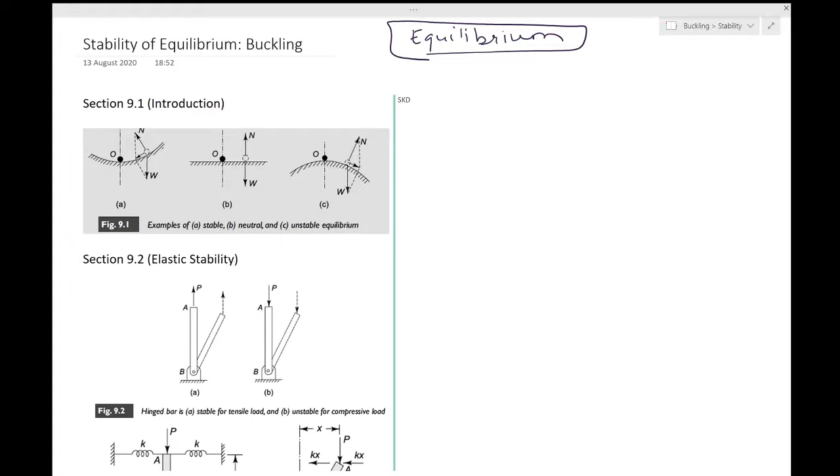In this chapter, we shall widen the scope of our investigation by considering the behavior of systems when slightly disturbed from their equilibrium configuration. So this is what we do—we want to disturb this slightly. Until now we haven't done this.

We want to see what will be the behavior of a system that is originally in equilibrium when you slightly disturb it. When the forces no longer balance within a system, there will be acceleration and, in general, a complicated resulting motion. We shall not attempt to obtain a complete picture of this motion, but restrict our attention to this question: when slightly disturbed from an equilibrium configuration, does a system tend to return to its equilibrium position, or does it tend to depart even further? This is about the configuration of a system.

The words are very careful, and that's why they have been italicized in your textbook: when slightly disturbed from equilibrium configuration, does a system return to its equilibrium position, or does it tend to depart even further? So just take a particle physics example.

You have particles 1, 2, 3, and 4, and they are in equilibrium—meaning the forces and moments of this system are balanced. Now if you slightly disturb this system from its equilibrium position, taking one point to somewhere new, will this new configuration—which is not in equilibrium but slightly outside of it—rearrange itself back into equilibrium, or will it become more away from equilibrium? This is something we have already seen earlier.

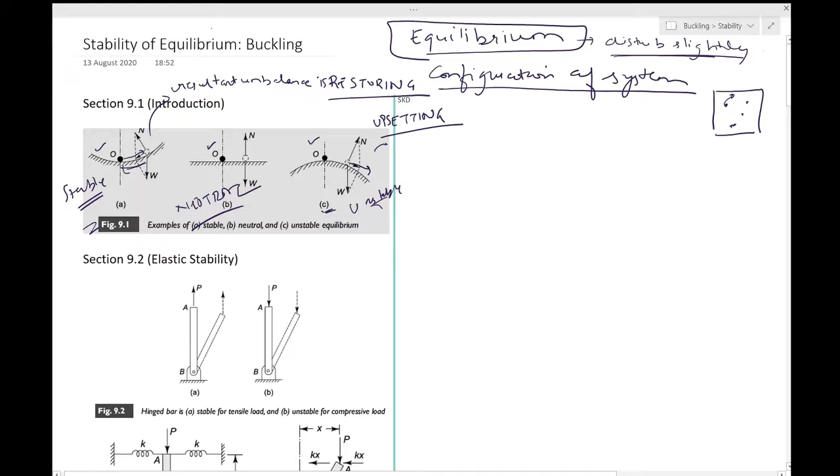A system is said to be in a state of stable equilibrium if, for all possible geometrically admissible small displacements from the equilibrium configuration, restoring forces arise which tend to accelerate the system back towards equilibrium. Please note the definition very carefully. It says for all possible geometrically admissible small displacements.

It was possible for this to go over here, at this new position, but this was not geometrically admissible given the way we were in this problem. So it has to be either along this or along this. So, all possible geometrically admissible small displacements. Small is again important, because you want to only slightly change the configuration, like this was only slightly moving on this side to disturb from equilibrium.

Restoring forces will now arise which tend to accelerate the system back towards equilibrium. Do remember, coming from this state back to equilibrium is through acceleration. There is no equilibrium over here, no equilibrium over here, but equilibrium at this point O. Neither at this point was there equilibrium, nor in this path from this to this will there be equilibrium. That is something you have to keep in mind, that your system will be in acceleration when it wants to come back to equilibrium, in stable equilibrium.

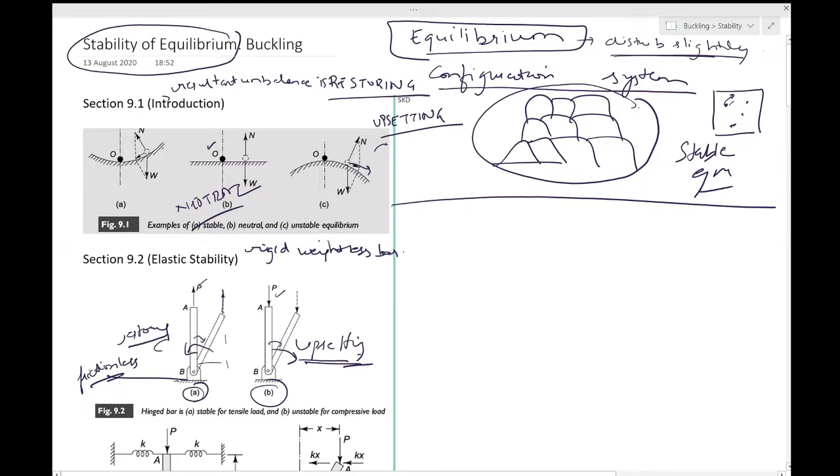Now let's see this in terms of another example. So this unstable structure is what we want to see now. It can be stabilized by adding guy wires or transverse springs. So for this system B, if you put in springs like this, then this will be stabilized.

How would that happen? If you give a small rotation like this, it would be somewhere over here, and you would have P. What would be happening? This particular spring will try to pull it back, this particular spring will try to push it back, so it will have to go back over here. It is sort of competing. So these two springs are trying to compete against the upsetting torque which would act to destabilize it. Let's study how that happens.

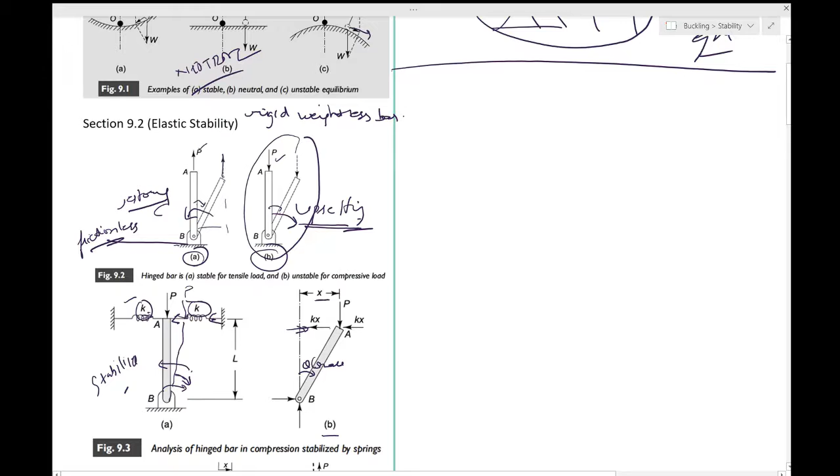So in this one, you have a free body diagram to analyze the effect of small transverse displacement x. What has happened is that this edge has moved x, and that means a small rotation has happened. And this is small, that's the important part. You can almost assume that this is going horizontally like this and not through an arc, but horizontally. The movement is horizontal, reason being this is small. If it is small, then the arc can be replaced by a tangent. So this is the tangent.

So if x is that small transverse displacement, what are the spring forces which act in the horizontal direction? That will be kx plus kx. Then you want to find the torque. That torque will be because of this lever L, so that will be 2kxl, restoring. And the upsetting torque, which is due to P, will be equal to Px. This is just like R cross F, so this will be your force, this is your x, this will be P. So that is Px. So you have 2kxl which is restoring, Px as upsetting.

Now you want to discuss the stability of this system for small deflections. The small word is always there, it has been there throughout. Now it depends which of them is larger. If the restoring is larger, in the sense Px is smaller than 2kxl, then you will have a stable equilibrium. If Px, which is the upsetting, is larger than the restoring torque, then this will be unstable equilibrium. So this is fair enough, and you can see why these two conditions are there.

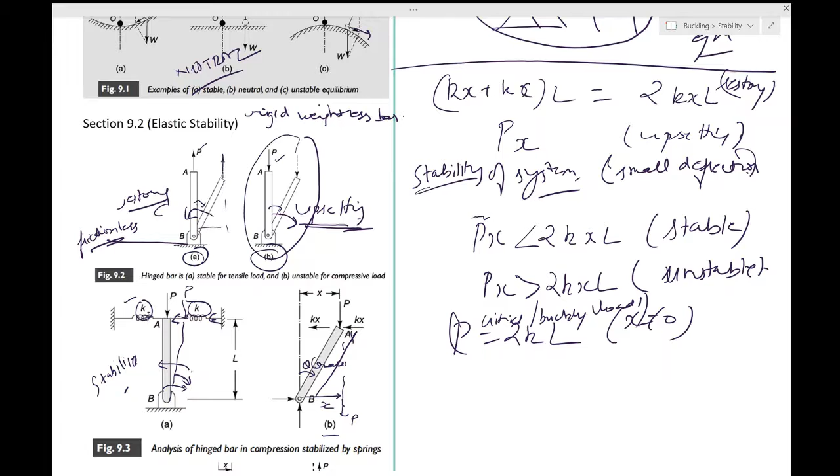Now we'll look at an alternative method of seeing this problem.

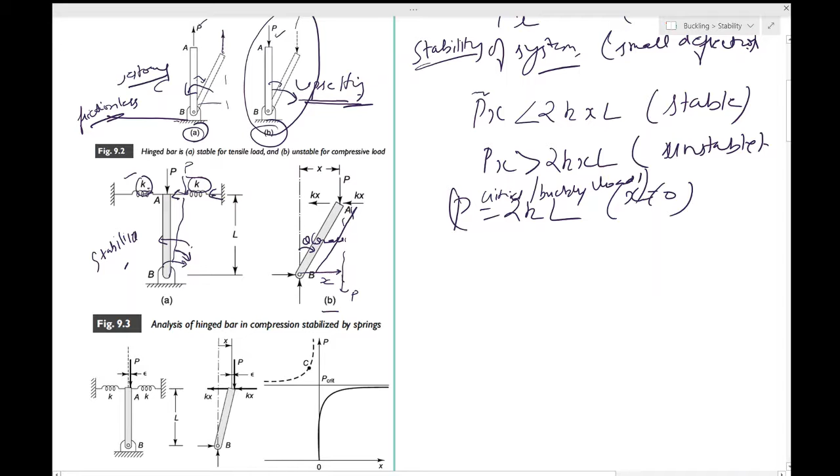An alternative method of studying the structure, which gives further insight into the stability problem, is indicated in figure 9.4. Here we take the force P to be applied slightly off center. Look at this figure: P is not applied exactly on the center, this dashed line, as it was in the earlier cases. It is applied slightly off center. The small distance epsilon is called the eccentricity of the load.

So epsilon would be 0 if it was acting along the dashed line. The assumption of some eccentricity provides a useful model for many types of imperfections which occur in actual structures. That is, the bar might not be exactly straight, the springs might not be perfectly balanced.

So why do we have this eccentricity? It's not necessary that the load will be applying exactly on the center. It may be because we may not be able to achieve what exactly is shown on paper. Meaning, if the bar is not exactly straight - if you hold a pen on your desk and you try to apply a P force vertically, it is likely that this pen is not exactly perpendicular to the table. So there is an imperfection there.

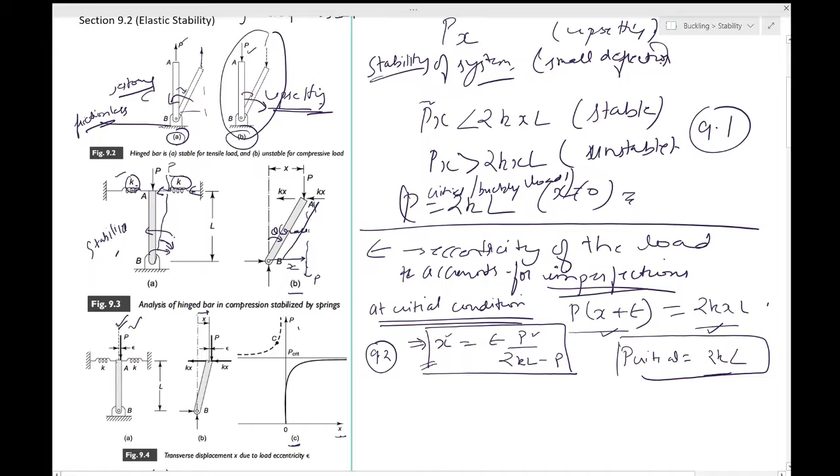Physically, what it means is if P is around that critical point, then x will become very large. So you have to be careful around that P. And that P is anyways the distinguishing factor between stable and unstable equilibrium. So that's an observation which is already made.

Now what happens further? The dashed curve which you see in this figure satisfies equation 9.2, and thus represents equilibrium positions, but these are for unstable equilibrium position. So this is somewhat of a mirror image of this one, and it will satisfy this equation.

If x is small and negative, then P will be of this value. If x is small and negative, P will be like this, and above the critical point this will be like this. So over here you are in the stable region, over here you are in the unstable region.

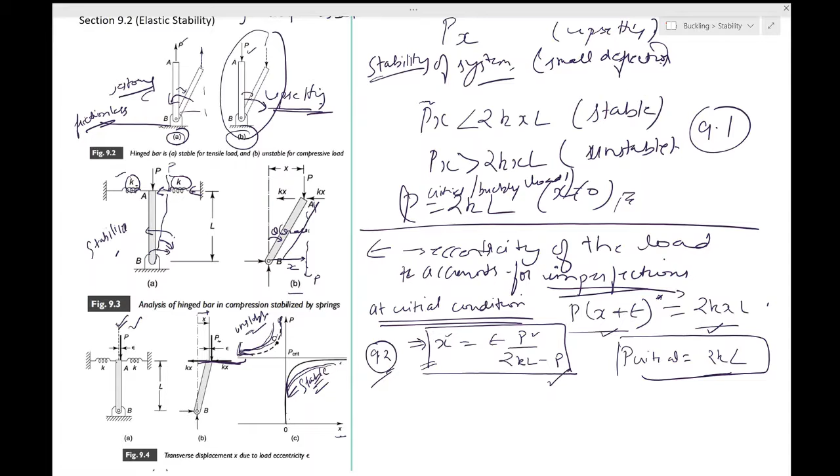So one of them is stable, the other is unstable equilibrium. You can see that one of them is trying to take you away from P critical, the other is trying to take you towards P critical. This can be seen by considering figure 9.5. Let's see 9.5.

This shows the configuration corresponding to point C in figure 9.4c. So C is where we are right now. This is an unstable equilibrium and we want to see why it's unstable. You have a negative x, meaning if it was moving on this side you have a positive x, so this side was positive, this side was negative. It has moved by this distance minus x, the center has moved by this distance minus x.

This spring will now push it, so it will be kx. This will try to pull it, it will be kx. x is negative in both cases. And this shows the configuration concept.

Imagine a small disturbance of position where the strut moves to the left, that is x becomes more negative. According to figure 9.4c, a smaller value of P is required for balance in the disturbed position.

So from x equal to 0, you have an x equal to minus x, some negative value. You see the P required will be less. That is what they say: a smaller value of P is required for balance in the disturbed position.

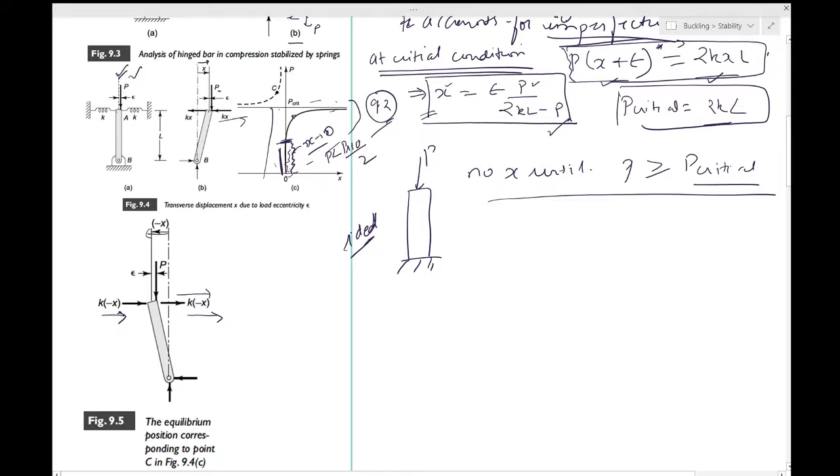This is different than what you had done in the previous 8 chapters of this book. In the previous chapters, we have always assumed that because the deformation was small, the equilibrium requirements could be applied in the undeformed configuration. Generally, this is acceptable if the system is elastically stable and not in the neighborhood of a critical load condition.

So that was a very specialized assumption which you were taking. So if the loads are far away from the critical load, then only that is okay. Otherwise, you must do your force and moments balance in the deformed configuration. And since we are learning about an instability over here, we must consider that particular point.

So since we want to study the stability of equilibrium itself, we will not risk assuming that the loads are not near the critical region. So we have to work in a domain which can be over here as well.

This was fine, something like this, in which you could define the force and moment balance in the undeformed case if you were in this domain. But since you want to study this entire graph, it's always better to write the force and moment balance in the deformed configuration.

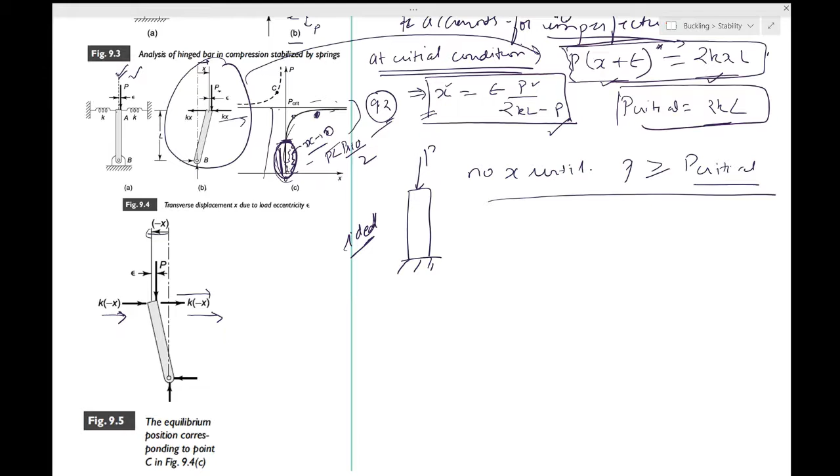Let's see an example of instability. There are many examples of instability, but let's start one by one. So we have this.

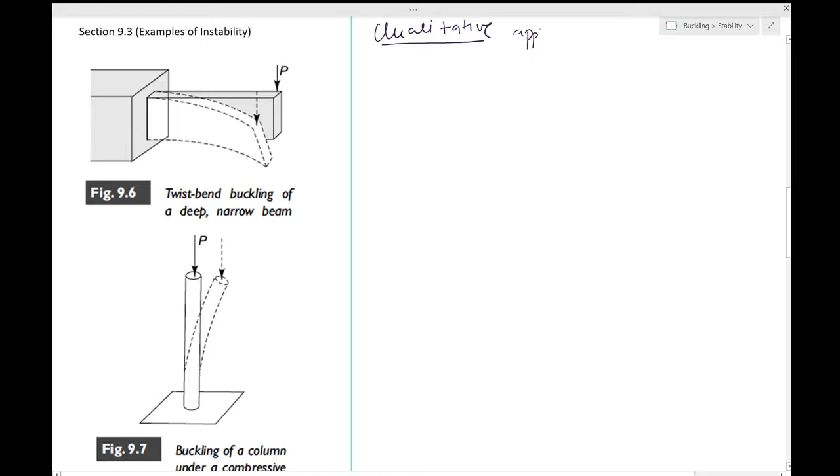Several instances of instability are described briefly to provide the reader with a qualitative appreciation. We do not specialize in buckling over here, but we see a qualitative appreciation of this topic, meaning not a quantitative one - in the sense you don't start plotting lots of graphs for the whole system, but you should definitely be able to visualize what is the problem happening.

One of these cases will be studied in detail in section 9.4. I think that would be the bending or the twisting of the beam. We'll see that in the next one, just because we have enough mathematics and enough physics and enough equations about it so that we can study. The others we will just see briefly.

So take a thin, deep - each word is important, thin, deep - cantilever beam. So the thinness is important.

As long as the beam sections remain vertical, they resist the bending action of P very effectively, the deformation being of the type considered in chapter 8. As long as the beam sections remain vertical, they resist the bending action of P very effectively, and we have already seen that in chapter 8.

This is what happens for small values of P. So P has to be small for chapter 8 to work essentially. Now if P becomes larger than a certain critical value - we don't know what that critical value is in this case, but we know that there is some critical value for a system, in this case the cantilever beam.

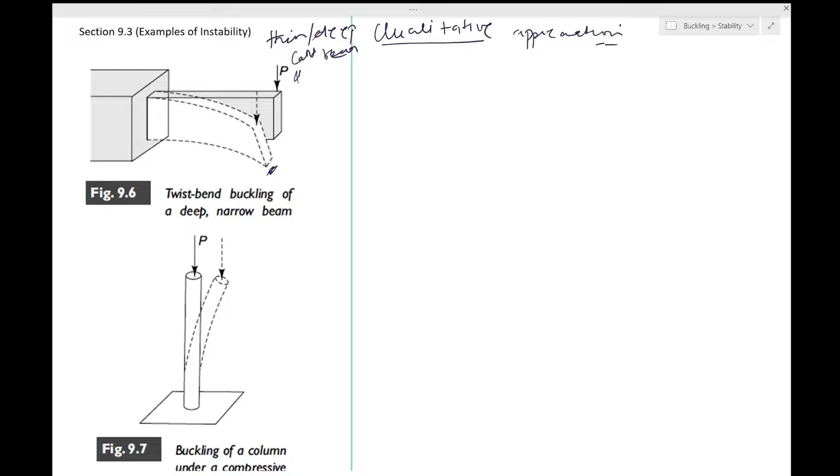Now in figure 9.7, you have a flexible column. The flexible column is shown subjected to vertical compressive load. For small values of P, the column remains straight and is compressed uniformly. You know that—if you take, say, a rubber tube like this, for small values of P, it will be vertical and compressed slightly uniformly.

Now if P becomes larger than a certain critical value, the vertical position of the beam becomes unstable. A small disturbance causes the column to bend out or buckle. So then, if P is large, thereafter a small disturbance of the beam will make the column bend out or buckle. So this is bending out or buckling.

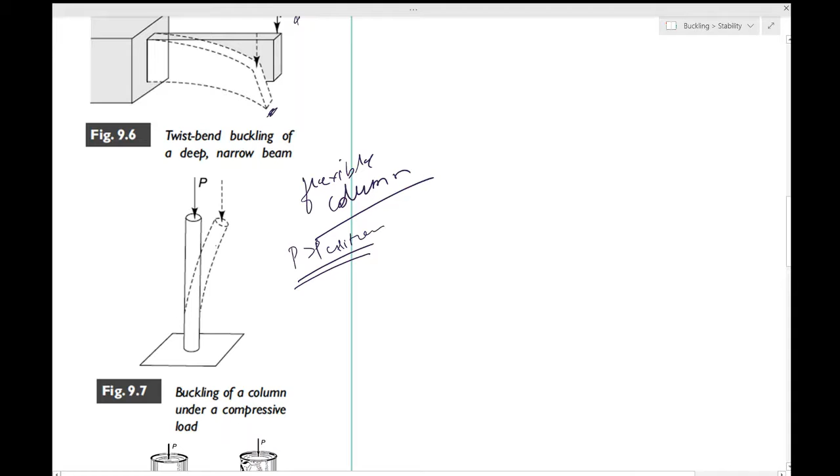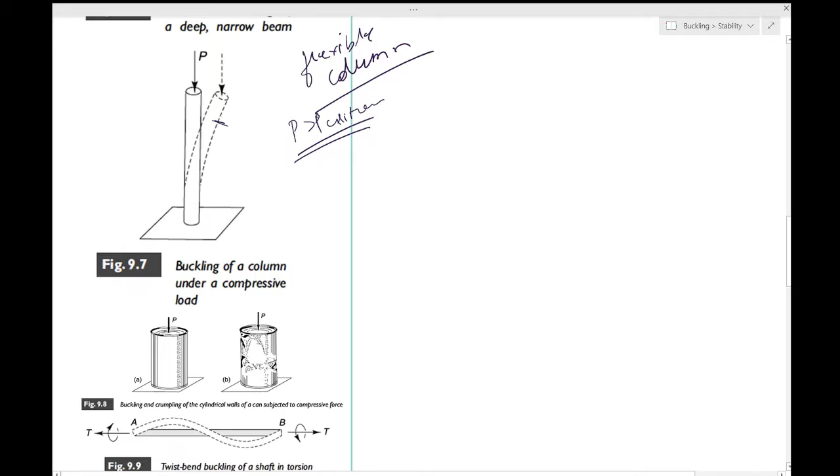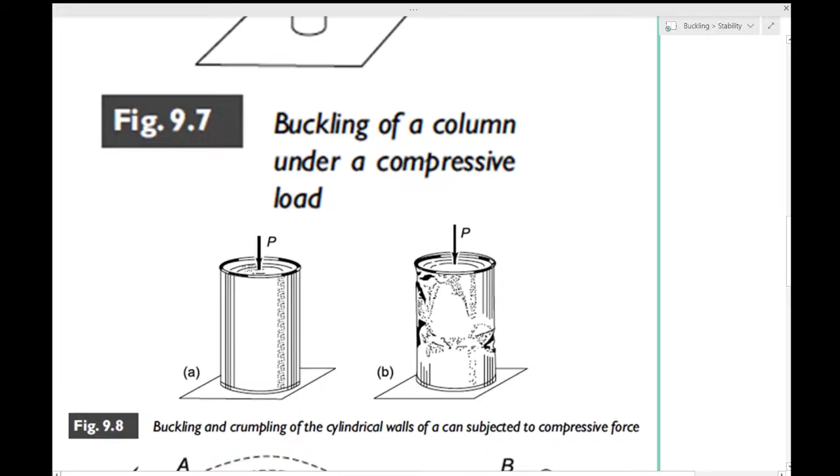A somewhat similar situation is shown in figure 9.8a, figure 9.8. What we have over here is a thin walled cylinder—remember, we have learned so much about cylinders.

In your textbook, the example given is that of a beer can, but I think a soft drink can should also be enough to do this experiment. This is subjected to a compressive load P, and for small values of P, the vertical walls remain cylindrical. You can take the drink out of the can and do this—for small values of P, it will be vertical and will be compressed cleanly.

Now if P becomes too large, this position becomes unstable. If you try to crush a can like this, you place it under your foot and apply a large force, that is where this crushing will happen, and a small disturbance causes the vertical walls to bend in and out and eventually to crumple, in a rather complicated pattern, as indicated in 9.8. Some parts will go in, others will come out. This is called crumpling, and this is unstable.

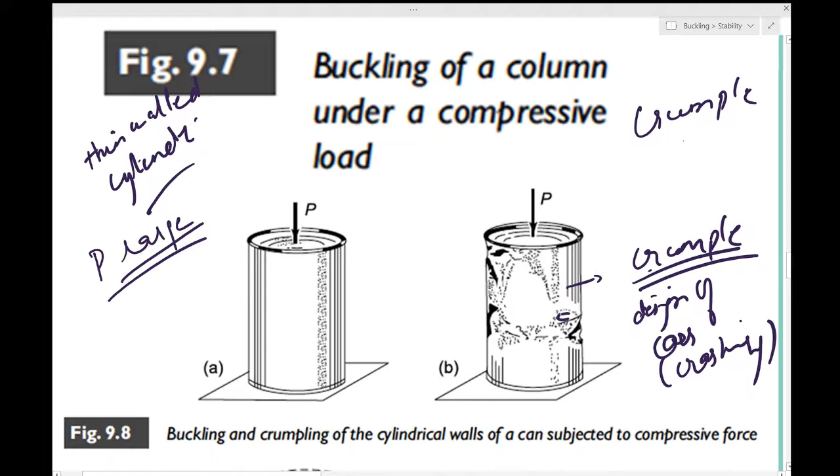The important part is this, and I will repeat the reasoning once more. It's not that P keeps becoming large and this happens—no, because it is not a load versus displacement graph we are trying to draw. It's not an elastic or non-elastic thing. We are trying to learn where the equilibrium is no longer valid. So it is in equilibrium; as you keep increasing P, it continues to be in equilibrium, but the compression is there. Perhaps you can have this linear relationship by that time.

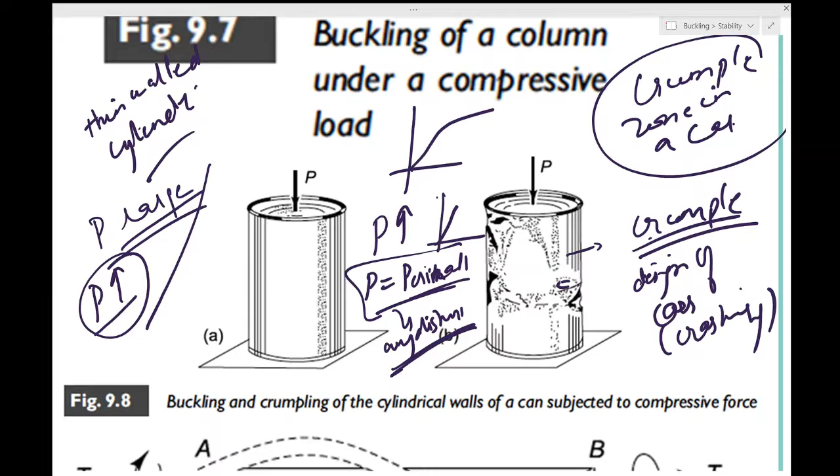What happens is when P becomes greater than or equal to this P critical—we don't know what it is for this can, but we know there is a critical value—after this, any disturbance of any type, either a tremor or a load or anything for that matter, will be enough to take it away from equilibrium. So that is exactly what is happening. Please don't confuse this by oversimplifying the situation.